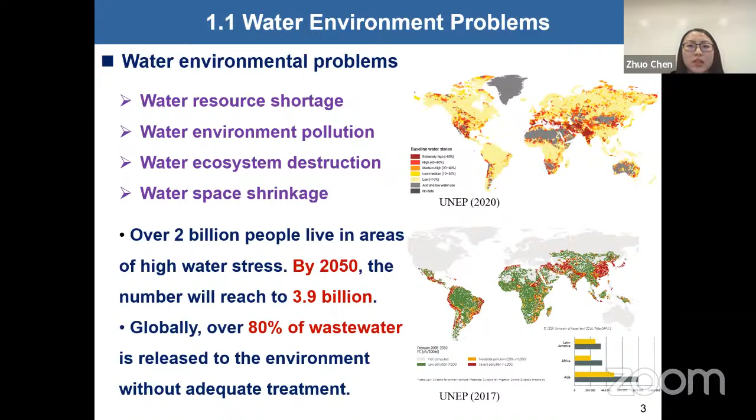Having faced these water environment problems, we are thinking about water reuse, which can, on one hand, extend water supply capacity, and on the other hand, reduce wastewater discharge and pollution loadings.

However, compared to the drinking water system, the sources of water in water reuse are much more complicated, so there are challenges to ensure water safety and reliability. Although it has some similarities with wastewater treatment, it is much more complicated, because it is a product after treatment and reclamation that will supply different end users for different water reuse applications.

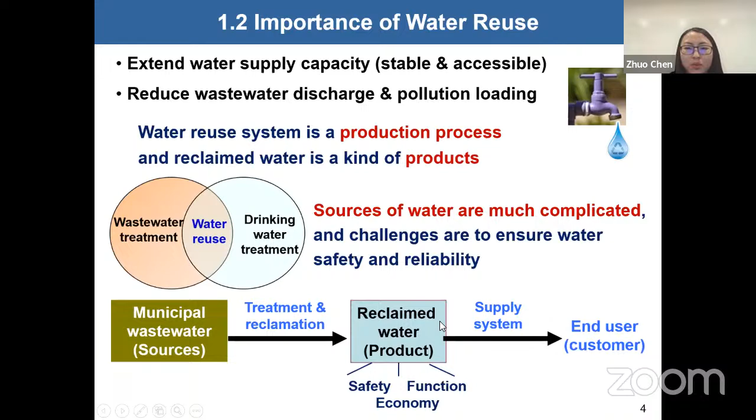This figure shows how water reuse applications are included. We can see that, depending on the treated effluent quality, which can be as low as just secondary effluent or as high as after advanced treatment technologies, and also depending on end user requirements, it can be applied for different applications.

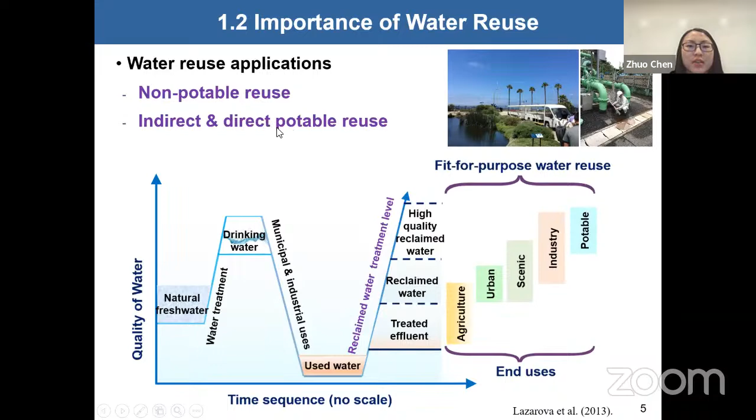For example, it includes agriculture irrigation, urban miscellaneous uses, scenic environment uses or environmental flows, or industrial uses, and it can even be used for potable purposes—either indirect potable purposes, like when it's discharged to environmental buffers or goes into groundwater recharge, or it can also be applied for direct potable reuse, for example sending the water directly to water recharge tanks or drinking water pipe systems.

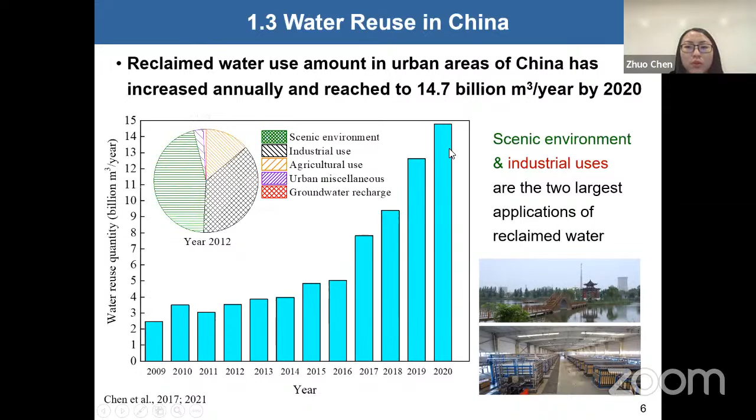Here is some information about water reuse in China. The reclaimed water use amount in urban areas of China already reached about 14 billion by the year 2020. Most of this reclaimed water is mainly used for scenic environment, like environmental flow augmentation or recovery, or industrial uses. These two end use applications may occupy about 80% of total reclaimed water use in China.

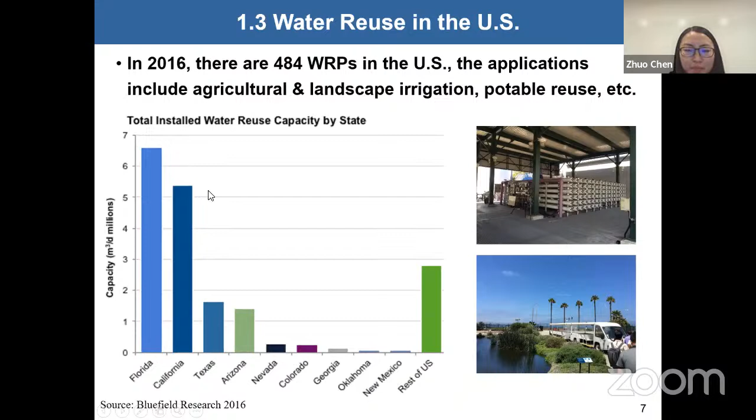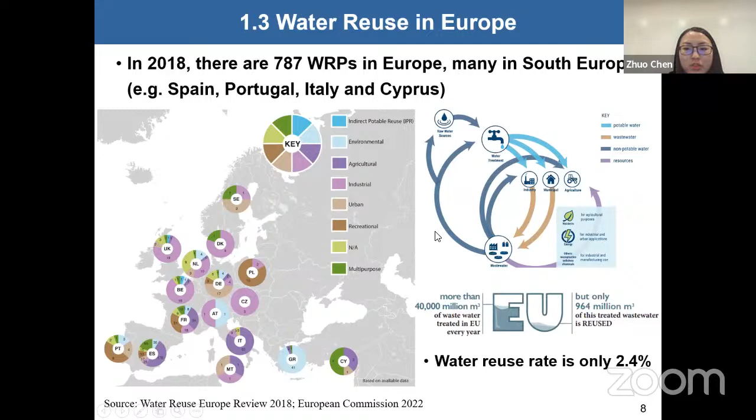In Europe, in 2018, there were about 780 water reclamation plants, but many of these are in Southern Europe, like Spain, Portugal, Italy, and Cyprus. However, when we look at the whole of Europe, the water reuse rate is still relatively low, only about 2.4%.

It is expected that the amount of high quality reclaimed water with tertiary or advanced treatment will increase largely, because for many end use applications, such as industrial uses or potable uses, advanced treatment technologies like membrane technology are often applied and also expected to increase largely. A global trend is towards sustainable growth and development, especially in countries like China, the United States, and some countries and regions in the Middle East.

Due to the high demand on reclaimed water, in 2013 the International Organization for Standardization founded a new technical committee on water reuse. The founding representatives from China and Japan signed the agreements, and there was also an inaugural ceremony for the first meeting. After that, this technical committee on water reuse was initiated.

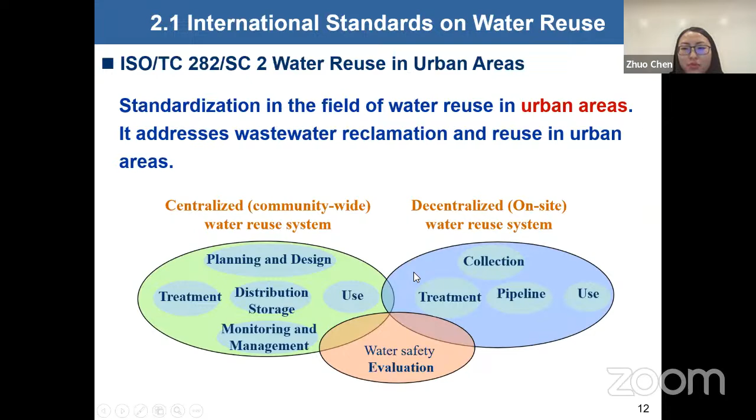So here is the guideline for this subcommittee, water reuse in urban areas. We can see that there are guidelines for reclaimed water safety evaluation, while also the guideline for the centralized water reuse system and also decentralized or on-site water reuse system, including the design, management, and other issues, while also have the guideline for reclaimed water treatment, because we know that there are different treatment technologies from the basic or commonly used one to the more advanced systems.

There are also guidelines for reclaimed water distribution and storage and reclaimed water use, because as we mentioned before, there are different applications which may also relate to different water quality requirements. And we also have the guideline for reclaimed water related products and services.

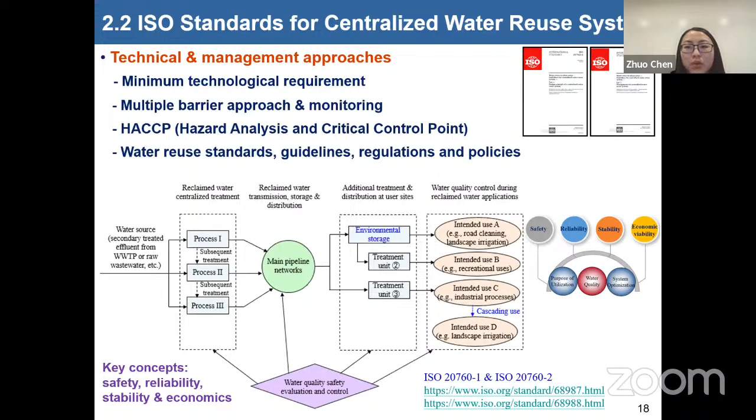On this standard, we also introduce a model which is reclaimed water for multiple applications, because we know that for different end users, the water quality requirements might be different. So for the reclaimed water project, it can have multiple applications, but for different applications, there can be different reclaimed water quality and also different associated treatment technologies or requirements that apply.

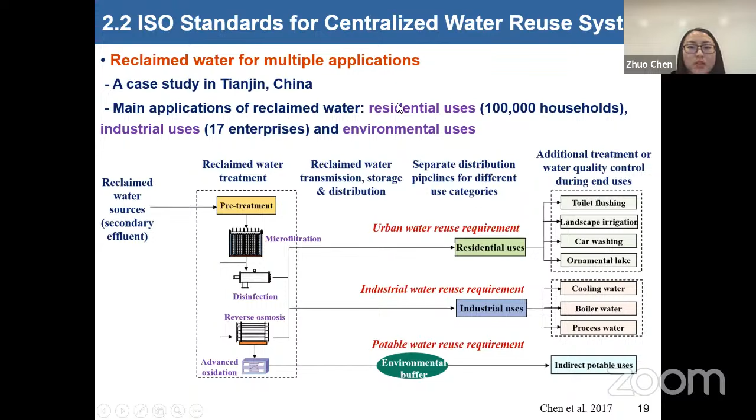This kind of model has actually been applied in some cities of China. For some of the large-scale water reclamation plants, it has been practiced quite well. And for another standard, which is about the decentralized water reuse system design, again, we also address the technical and management approaches, and also have the safety considerations, especially in terms of health safety, environment safety, and facility safety.

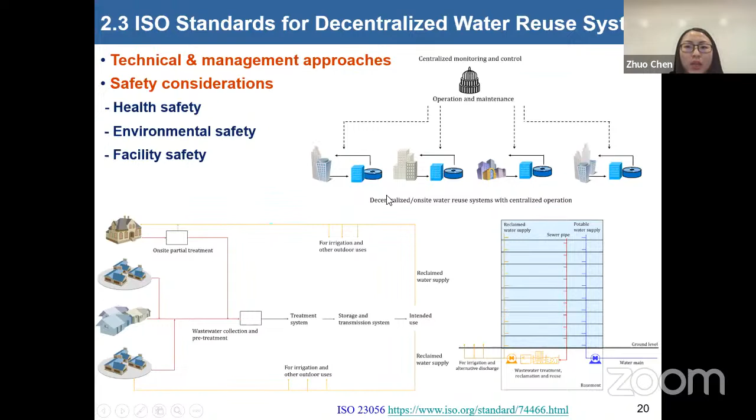We have introduced different models, because decentralized water reuse systems can have different scales. For example, large scales with centralized operation, community-based or cluster scale systems, household scale systems, or even individual buildings. So for this guideline, we introduce different scales and also the different principles for each.

Another standard is about water safety evaluation, because reclaimed water sources still contain some pathogenic microorganisms, dissolved organic matters, and some nutrients. So in order to ensure the safe use of reclaimed water, we have to pay attention to these potential hazards, and then conduct water safety evaluation.

In this standard, we have introduced the water reuse safety evaluation framework, including water quality analysis, treatment evaluation, and other considerations like safety evaluation and public acceptance. And after that, it's the safe water reuse practices.

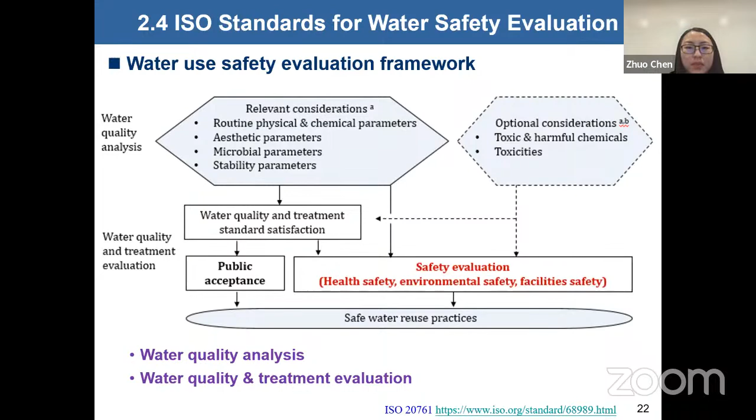Regarding these standards, since we published them in 2017, we have already applied the key principles and technologies from this standard to different countries. For example, it has been directly converted into British guidelines, French guidelines, and it also supported the development of the Portugal regulations on water reuse.

Lastly is the summary and perspectives. We know that there is still large water reuse potential globally and in China, and both technical and management approaches for water reuse systems and water safety control and guidelines are important. At the same time, international or national standards, guidelines, regulations, and policies are vital for sustainable water reuse.

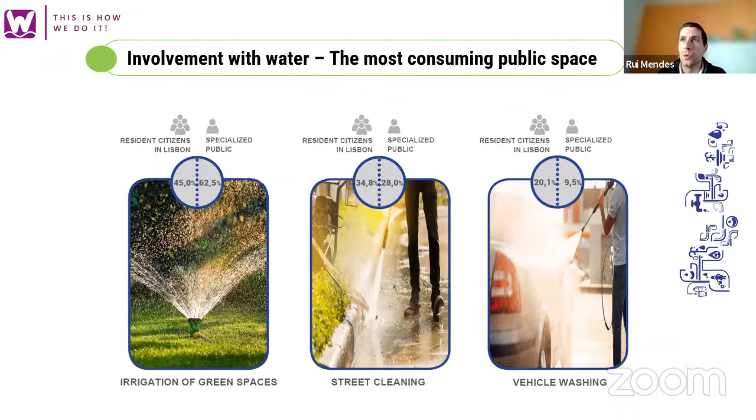Now, the responses identified several of the most consuming public spaces in Lisbon. The main ones were the irrigation of green spaces and street cleaning, and obviously they are quite right. So these naturally come as the main uses to tackle, or serve as a potential option for wastewater use.

Now, the perception of the origin, we wanted to evaluate for the residents and the specialized public, what was their perception? From where comes the water that is used in the public spaces in Lisbon?

And we found that the amount of citizens that doesn't know or have no idea where the water comes from is actually pretty high, almost 36%. It's pretty high, which is worrying, and it's an issue that must be tackled, to teach and provide information to citizens about this kind of detailed information.

So there is also a very curious point, that almost 17% of the residents already associate wastewater use with public spaces. So that means that they already have the conviction that the practice already takes place in Lisbon. So although it's still not much, it's a plus to public acceptance.

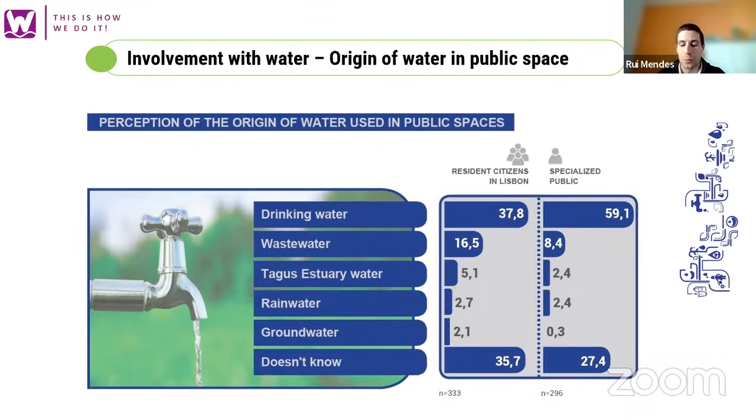In terms of the efficient water management actions identified by these surveys, we have the results in terms of the needs, and the residents consider that the natural way to achieve efficiency is the use of rainwater and wastewater. So these are the two most identified actions.

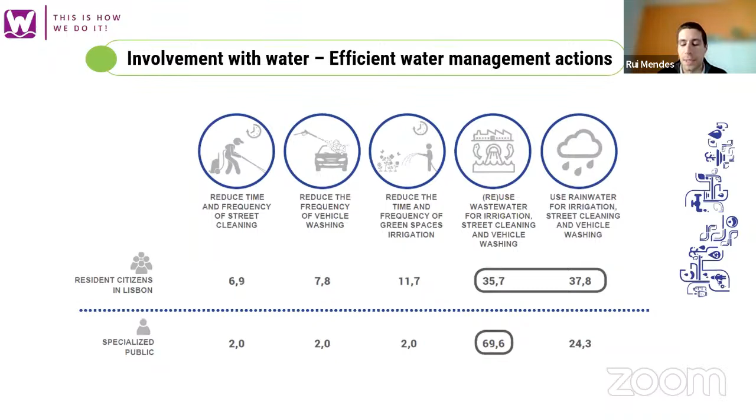And regarding the specialized public, it's totally different. We can see a huge difference, focusing much more on wastewater as a measure to improve efficiency in water management. But we were already expecting this result from the specialized public, since it's more oriented towards the acceptance of wastewater.

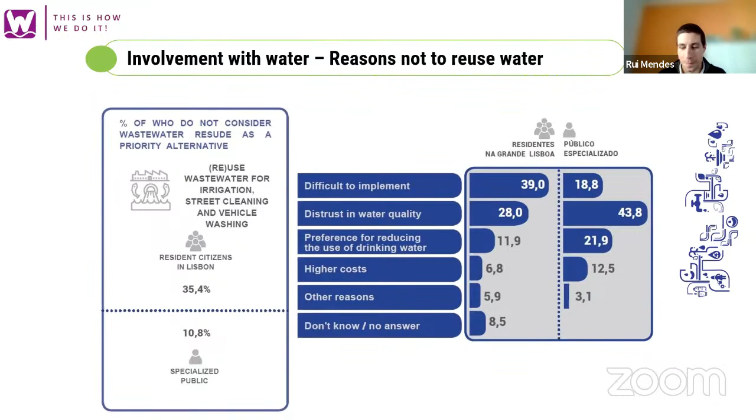Now, there are also positive associations and negative associations. And I'm turning now to the second part of the study, the receptivity to reuse. The citizens decode this concept into these positive and negative associations.

There are positive ones, and it is important to capitalize on them, in which I would like to highlight the efficient optimization of the natural resource, and also the very much mentioned cost reduction. And for the negative associations, the people still identify the incorporation of chemicals.

It's still a stigma, let's say, which citizens always associate with something harmful for public health, and insecurity regarding the quality of the wastewater. And it is also a negative connotation to increase the public investment. So this is important also to tackle these negative associations.

Now, as for wastewater use or reuse, citizens project mainly uses for irrigation and street cleaning. These results, as I had previously mentioned, irrigation and street cleaning have the most consumptive uses in the public space, and now they project them again as the main potential for the reuse uses.

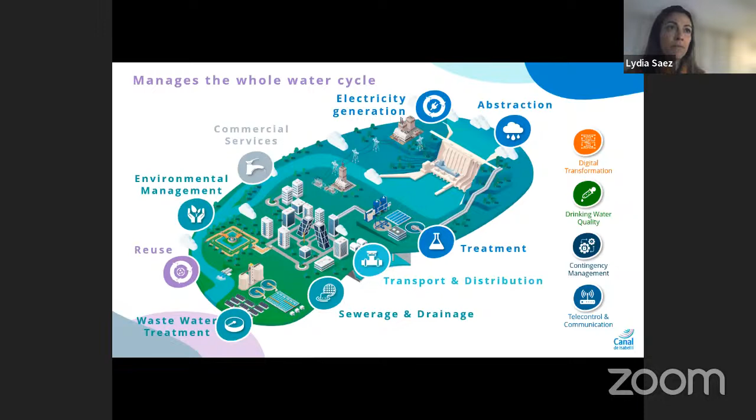The importance is that we are a very, very big company, and we can manage the whole water cycle including commercial services, digital transformation. We face environmental management, and we produce energy. We are the first energy producers in Madrid. It's relevant to say that we give benefits to society. We give energy. We are self-consumers, so we produce more than 100% of the energy that we consume, and we also provide energy to the network. And we have near 150 million euros of benefits.

So that's why we need to face new supplies of water. We give importance to promoting the consumption of reclaimed water. We haven't done this survey like you in Lisbon, Portugal. We think we have to increase our population's perception of water consumption, but we have implemented it.

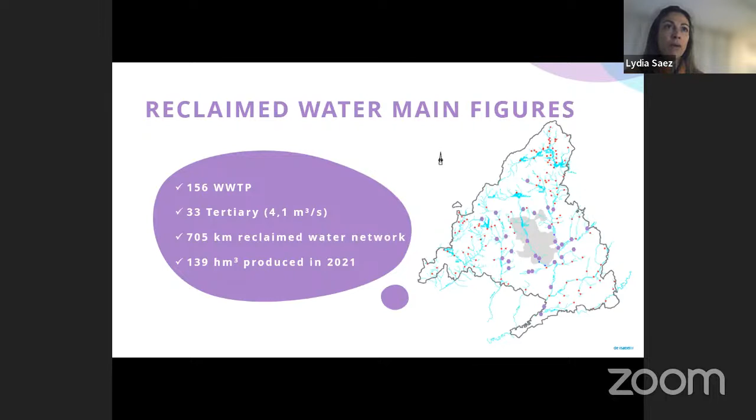But we manage more than 17,000 kilometers of pipes in potable water. So in percentage it's not very high, but you will see it's very important, because 140 cubic hectometers produced is a high amount of reclaimed water supply.

As I said, the main part is given to the environment. The other part, 17 cubic hectometers, are supplied to urban purposes. We don't supply water for agriculture. This is different from the rest of Spain, because in the south of Spain, near 100% of reused water is used for agricultural purposes.

Not in our case, because we don't have this amount of agriculture. We are in a more industrial and urban space. So we supply water mainly for irrigation and parks and gardens, near 60%, 26% for irrigation of golf courses, and 15% for industrial purposes.

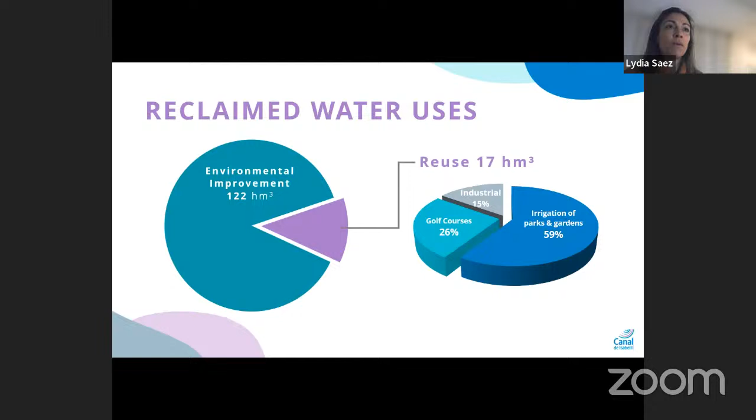Now I will talk to you about one of them. So the amount of reused water we supply is equivalent to the capacity of two of the 13 reservoirs in Madrid. So it's not a big percentage, but it's a great amount of water.

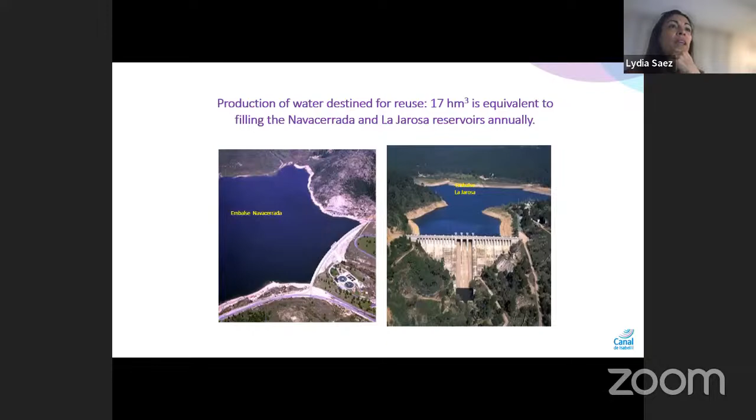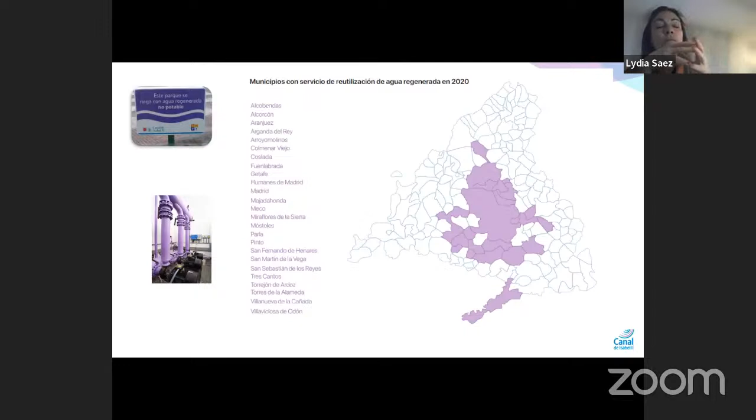We supply water to 26 municipalities. We have more than 400 reuse contracts. We irrigate more than 400 parks and 11 golf courses. So at the end, we irrigate near 3,000 hectares. This is the map of the municipalities we supply with this reused water. I have to say that these municipalities include the most crowded ones in Madrid, with more than 1 million people.

In industrial purposes, I must say we have one of the biggest experiences in Europe with reclaimed water. This is one, formerly called Holmen paper, a manufacturer of recycled paper. They are producing recycled paper, and 100% of the product they manufacture uses reused water inside the product and inside the production. So they are using 100% reclaimed water. This is the first experience in Europe, and we are very proud to share it with you. It's possible, and we made it.

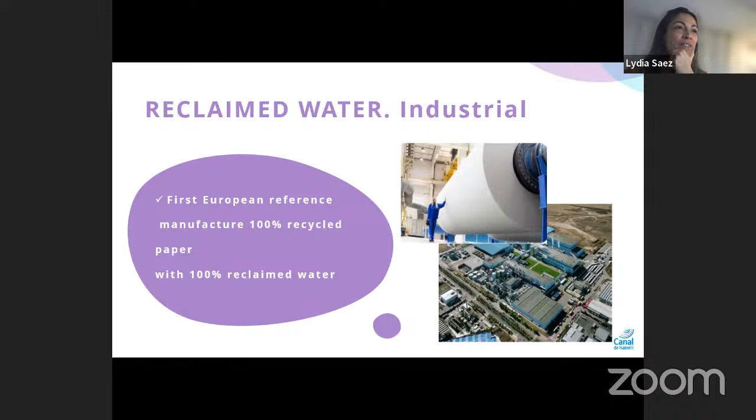We have 33 tertiary treatments with all the possible technologies, including sand filtration, cloth filtration, membrane filtration, from ultrafiltration to reverse osmosis, lamellar settling, ballasted sedimentation, and of course we are always looking for the best technologies that need less space, as all utilities do.

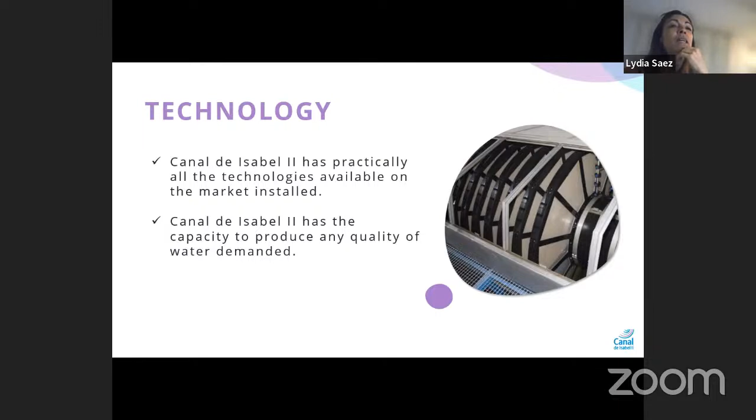We have all these possibilities and all these technologies available, so we can face whatever quality is demanded.

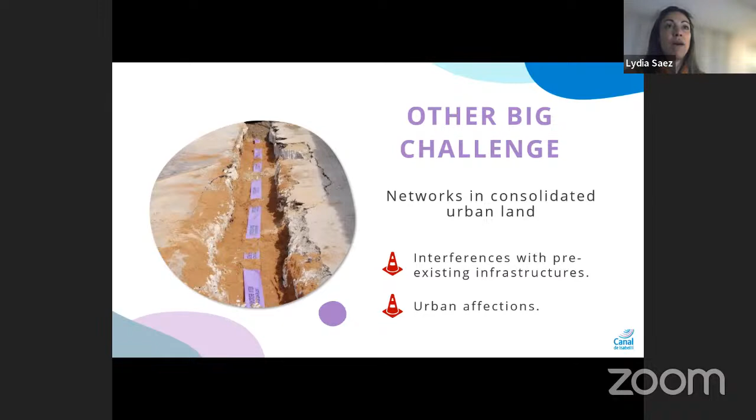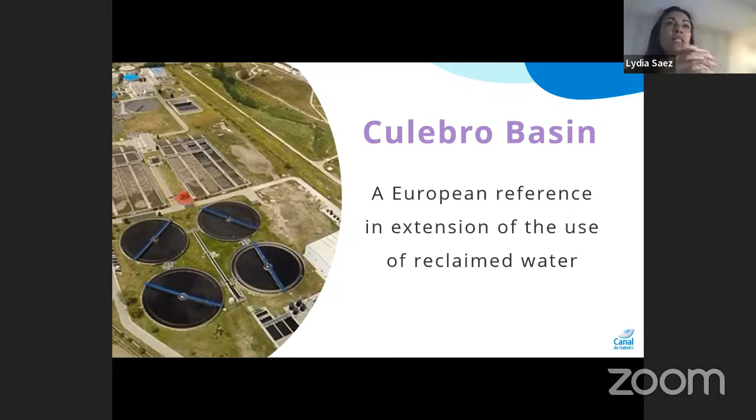Which is the challenge? The challenge is that we are implementing infrastructures in urban areas. That's difficult because you have to install your pipes in roads, and you have urban interference with existing infrastructure. So it's not easy, but we wanted to show you this specific experience that may show how to deal with this challenge and how to solve it.

We have this basin, one specific basin. From this Culebro wastewater treatment plant, we supply seven municipalities, near 1 million inhabitants, and we faced 45 million in investment.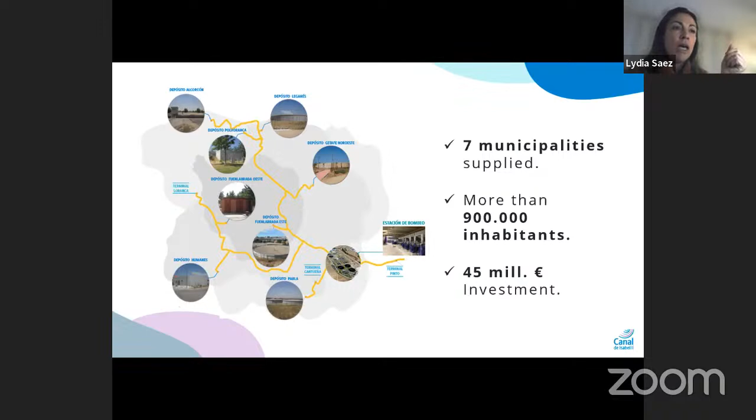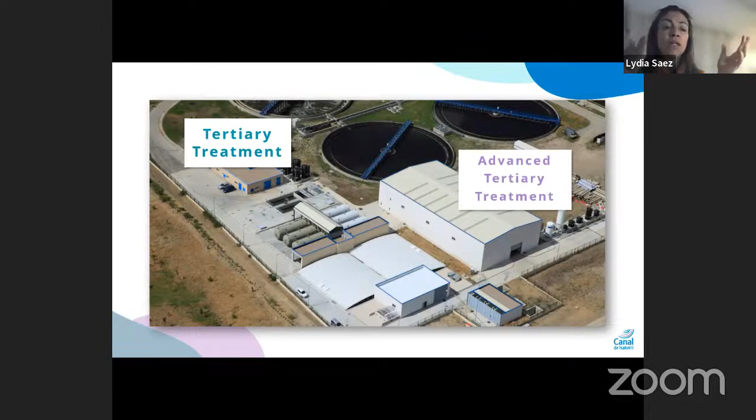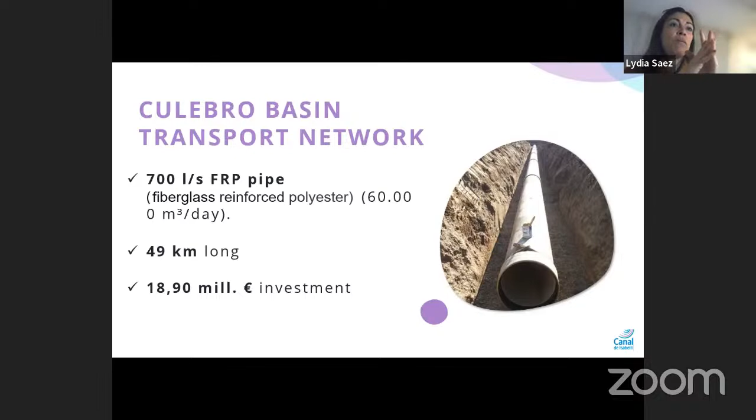In the wastewater treatment plant, we implemented one tertiary treatment, but after that, for the municipalities, there was this experience with the Holmen paper manufacturer. So we had to install an advanced tertiary treatment with reverse osmosis to provide water to Holmen paper. We installed more than 700 liters per second pipe capacity with more than 49 kilometers and 18 million in investment.

What is the difficulty? The difficulty is that you have to face one specific previous investment, but we can assure you we recover all this amount of money, even economic. But the most important thing is we face scarcity. When we don't have enough potable water, we can supply. We are supplying reused water, but this is more important in drought periods, as you can see. So in this specific moment, we had to deal with 45 million in investment.

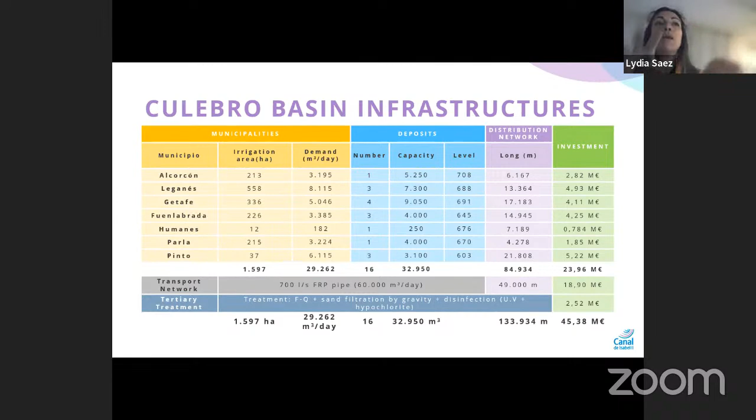But what is the problem? The problem is that we have infinite interferences. This is different from agriculture purposes because you implement your pipe from your wastewater treatment plant to the agriculture. We had to deal with roads, with train lines, with other pipes previously implemented, with power lines, with gas lines, vegetation, and subway, because we have to cross some subway lines.

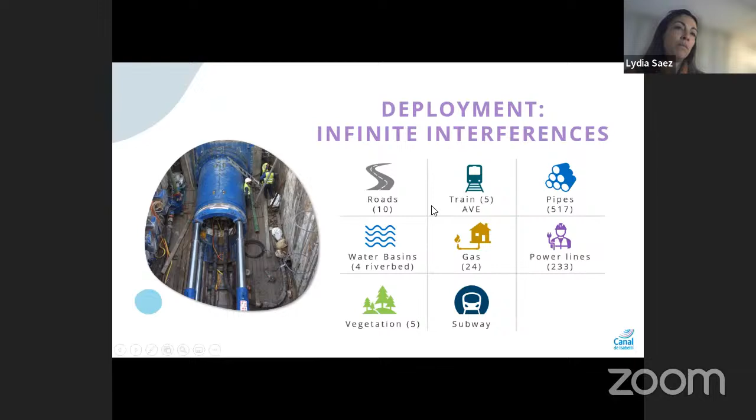But we have some advantages also, because as we are one specific company that covers the whole water cycle, we have a centralized production. So we have the wastewater treatment plants. We can produce the wastewater, we can face the tertiary production, and we can install and control the quality management.

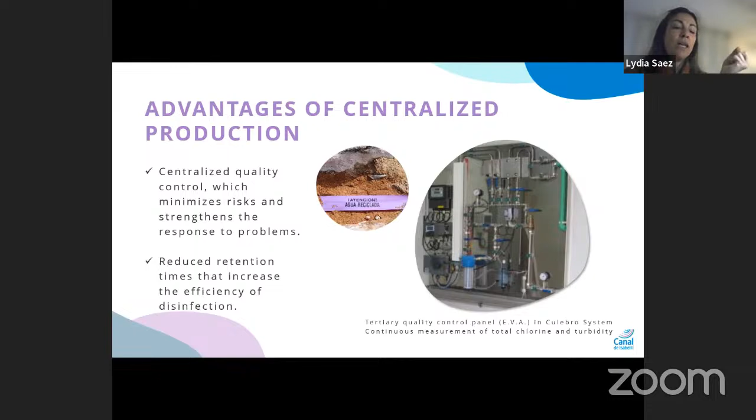We installed what we call EVAs, the tertiary quality control panels. There are automatic surveillance stations, and we can control the reduction of chlorine in the pipes. For example, we see that in this reused water, in 4 hours, it loses 80% of the chlorine, the residual chlorine, so we can face installation of new chlorination stations if necessary. So that centralized production led us to be the ones who control the quality of our water supply.

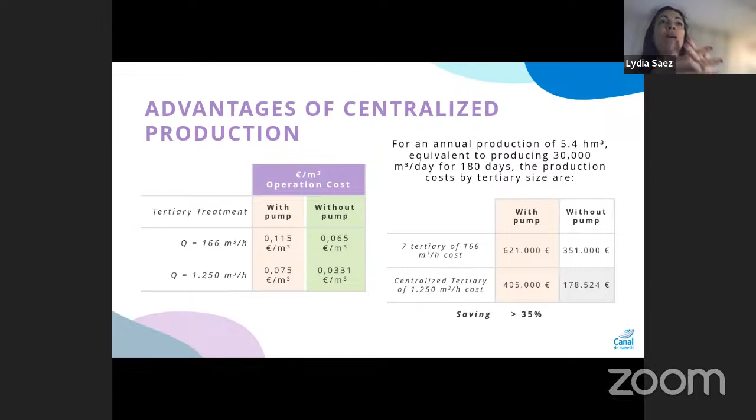This is one of the most important things we can do: promote reclaimed water through the citizens. We have run some campaigns. People don't have a good image of reclaimed water, maybe because they don't know where it comes from, or the quality of the water. But when you want to promote the use of reclaimed water, the most important thing you have to face is the price. For us, it has been very important, it has been decisive, because it has made people accept reclaimed water for their purposes in municipalities.

We let consumers reduce their bills. That's a problem for the company because it doesn't cover the whole cost that the production has. But for us, it's important to make people trust reclaimed water by using it. So we offer savings of up to 80% on their bills.

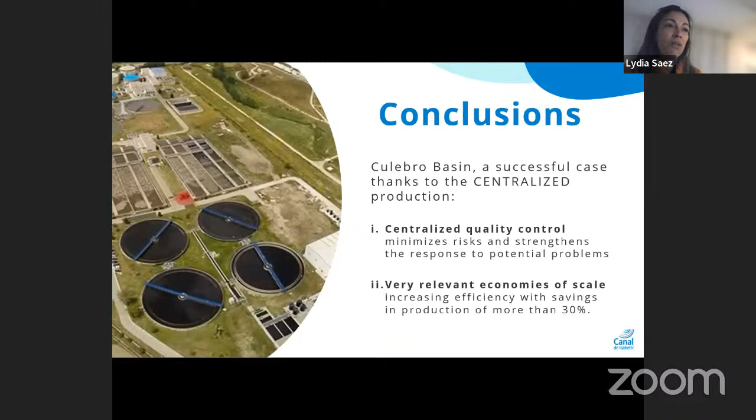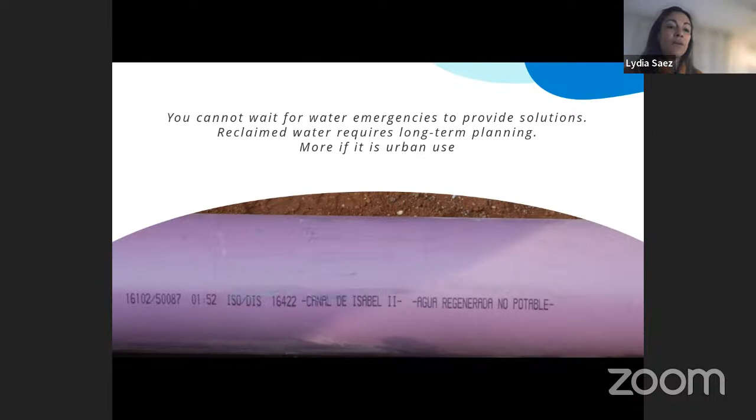So that's the end of my presentation. We always say that we cannot wait for emergencies to happen to provide solutions. So we face climate change, we face scarcity before it happens, and it's possible. Here is the example in urban uses. Thank you all very much. I'm available if any of you want to ask any question here or in the future with my email.